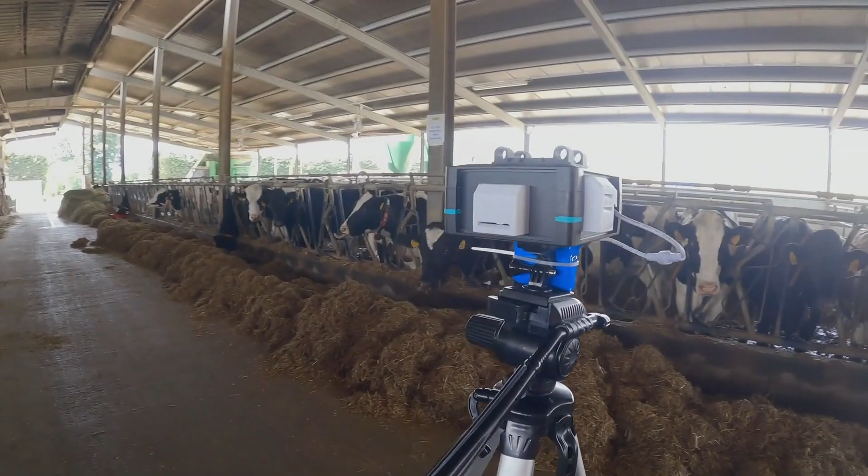Climate change is a growing problem, especially in food systems, which are considered one of the main sources of greenhouse gas emissions. Reducing emissions is one of the challenges to feed up to 10 billion people in 2050. To achieve these goals, it is necessary to develop efficient primary production systems with reduced impact on the environment, ensuring welfare and health of animals and operators. In addition, new systems for monitoring air pollutants are required to apply adaptive management strategies in farming systems.

In this context, the University of Florence, in cooperation with experts in the field of electronic and informatics engineering, in the frame of the CCC Farming Era Net project, developed a decision support system that can be applied at various levels, from farm management to research, control and certification bodies and public managers. The main objective is to create an off-grid measurement system of air pollutants and greenhouse gases, for real-time transmission to a server, its processing and subsequent consultation via web platform.

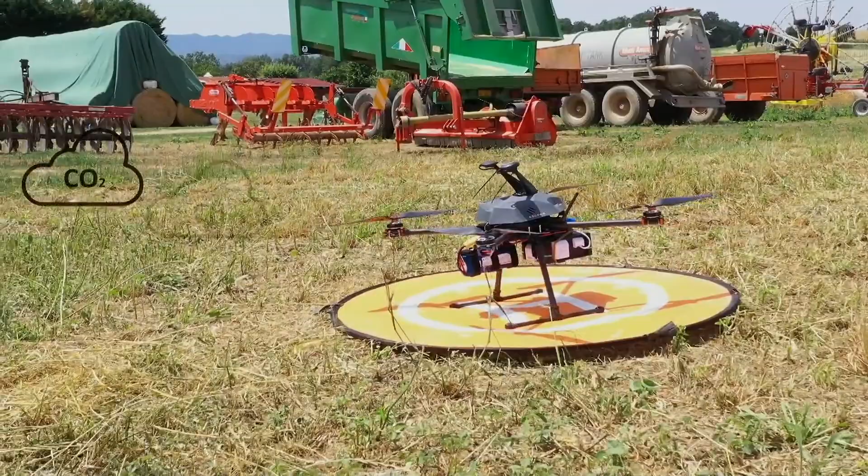The system is composed of a rotary wing drone equipped with a prototype control unit, specifically customized with suitable characteristics to host an optical and electrochemical sensor system. The sensors collect gas data in real time and provide georeferenced measurements that are transmitted to the cloud for further processing with proprietary algorithms and, finally, represented in a GIS environment for its correct visualization.

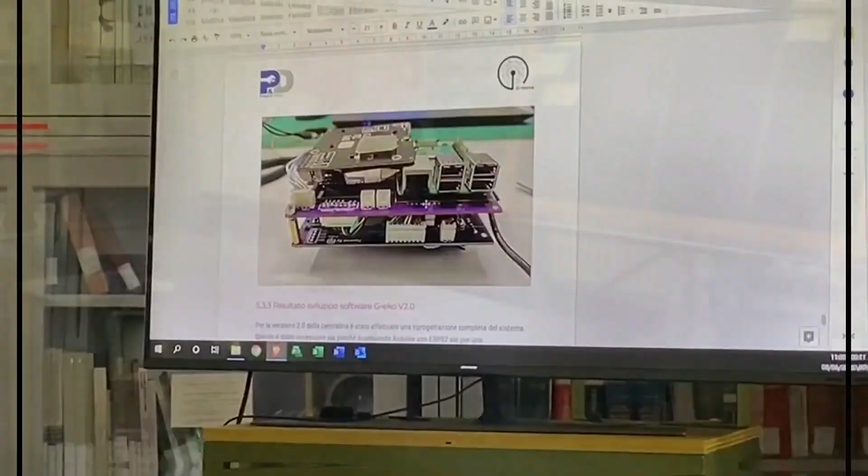During the meetings for the preparation and execution of the project, three major challenges emerged. The first was to develop a low-cost control unit equipped with high-accuracy sensors to collect and measure gases during flight. The second challenge was to create a small and lightweight control unit that could be used as payload on a drone and that would not considerably reduce the flight autonomy of the aircraft. And the third challenge, how to validate and test the developed system.

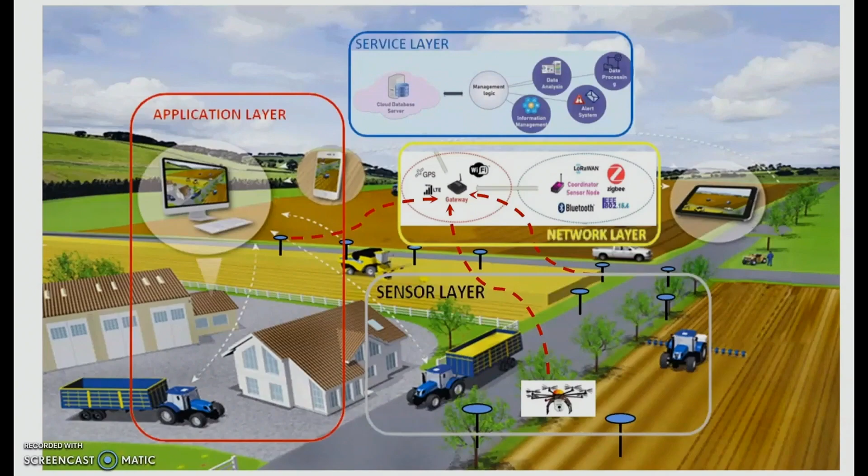For the realization of the first version of the control unit, the focus was on verifying the correct functioning of the entire system and, mainly, on the feasibility of the entire project. Basically, the system architecture is divided into 4 layers. Layer 1 is related to sensors for measuring gases. In Layer 2, the processing and transmission of the collected data towards the storage system is carried out. Layer 3 concerns data management and Layer 4 provides a tool for the correct presentation of the data. The functioning test and validation of the control unit and the sensors were carried out at the National Agency for New Technologies, Energy and Sustainable Economic Development, ENEA.

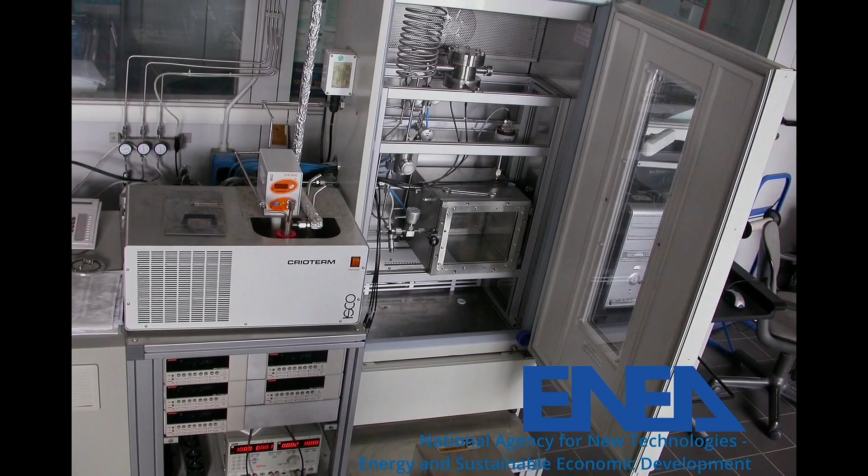ENEA is a public law body focused on research, technological innovation and the provision of advanced services to companies, public administration and citizens in the energy, environment and sustainable economy sectors.

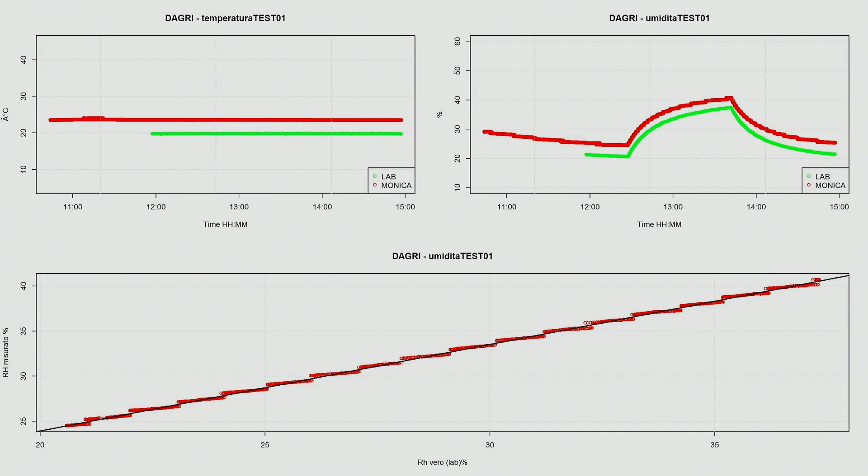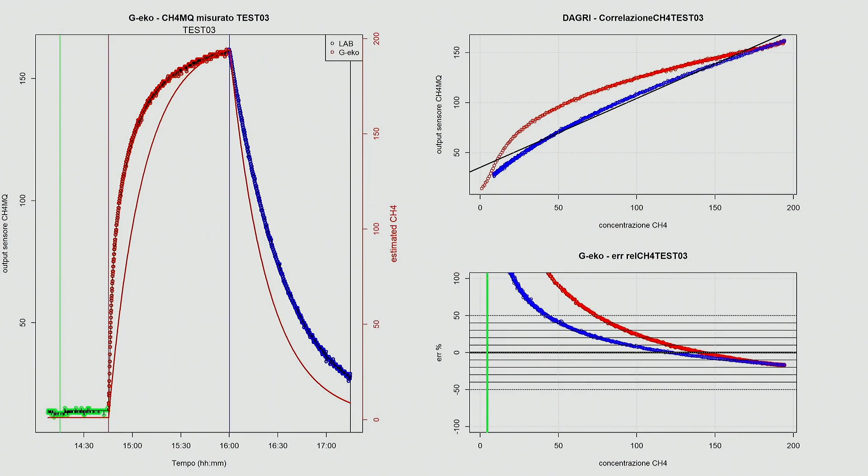For testing and validation, the compartment with the central unit and the sensors were placed in a 15L electropolished chamber equipped with industrial sensors, at a temperature of 20 degrees Celsius and 50% of relative humidity. Gases were injected into the testing chamber following a gradient of concentration, which was simultaneously measured by the control unit and the chamber sensors. After the tests, measures were analyzed by means of statistical regressions that demonstrated the high performance of the unit to measure gases and particulate. In addition, calibration equations were created to reduce the reading errors of the system.

Field tests were carried out on a livestock farm with approximately 450 dairy cows. 2 flights were performed on different days. The workflow included mission preparation, reconnaissance flight, mission planning and flight mission. The evaluated area encompassed all stages of production of the farm. Test results showed that the system clearly identifies the sources and levels of gas concentrations on the farm. It was possible to create maps of concentration and diffusion of gases in the total area of the farm.

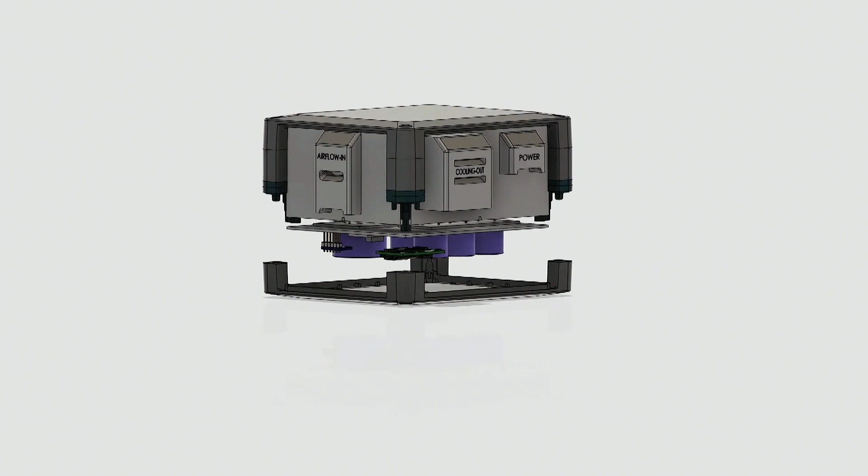After carrying out successfully the field tests, the necessity to develop a common version of the control unit for ground and in-flight measurements emerged. The weight and size of the ground control unit were not ideal for attaching to the drone. Therefore, for the second version, we focused on reducing the dimensions of the control unit. Also, we plan to include an application inside Raspberry to remotely view the measurements and be able to download data.

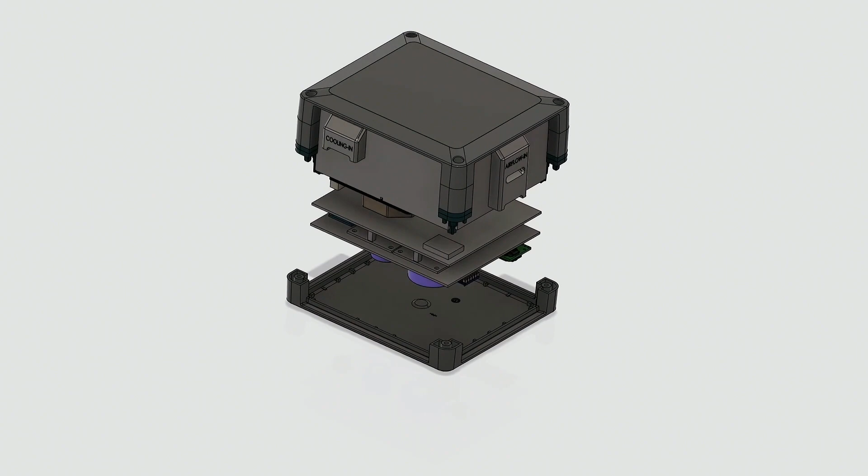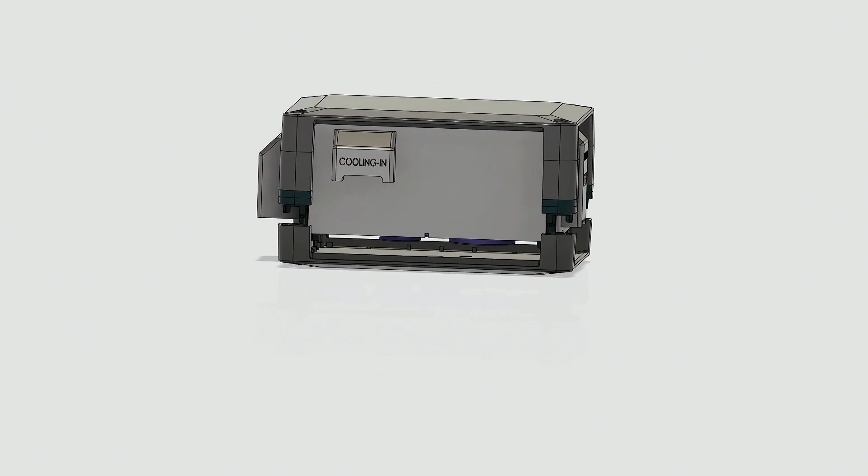In order to carry out a correct redesign of the control unit and to improve the problems highlighted in the first version, a 3D modeling program was used to simulate the volumetric occupation of each component of the control unit. The new version of the control unit carries 9 sensors and a Raspberry board in a volume of 804 cc, with a total weight of 750 grams.

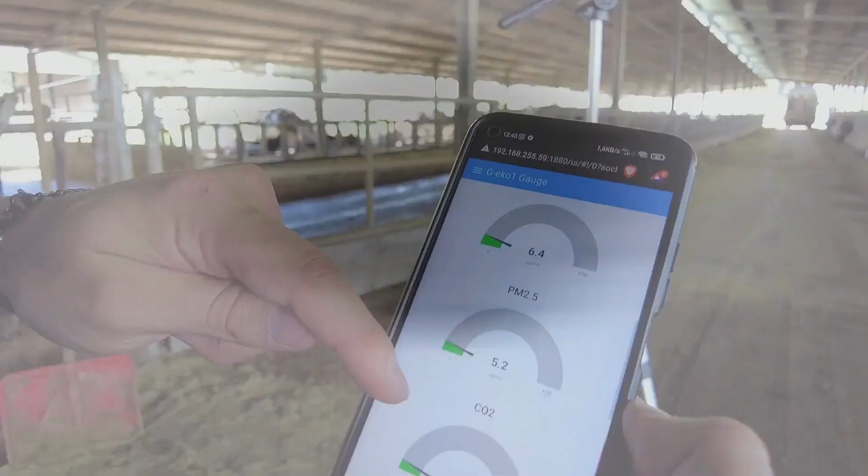A dashboard was implemented to remotely view the data. The dashboard can display information from several units at the same time. It is possible to observe real-time measurements from all sensors in the system in the same view, allowing a more dynamic analysis.

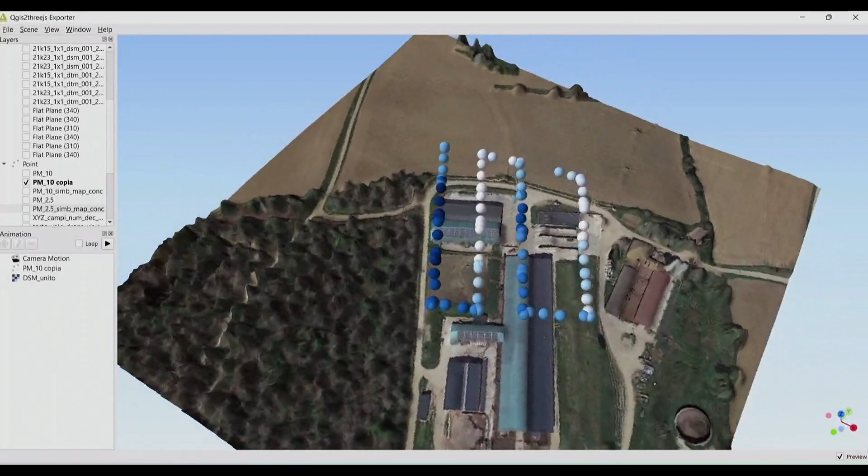In-flight measurements collected in the field need to be represented spatially. For this, the QGIS software was used to create a 3D map of the studied area and to perform an interpolation of the data, so that the spatial variability of the results can be investigated. In the tests carried out, the spatial distribution of particulate matter escape in a cattle farm was visually represented.

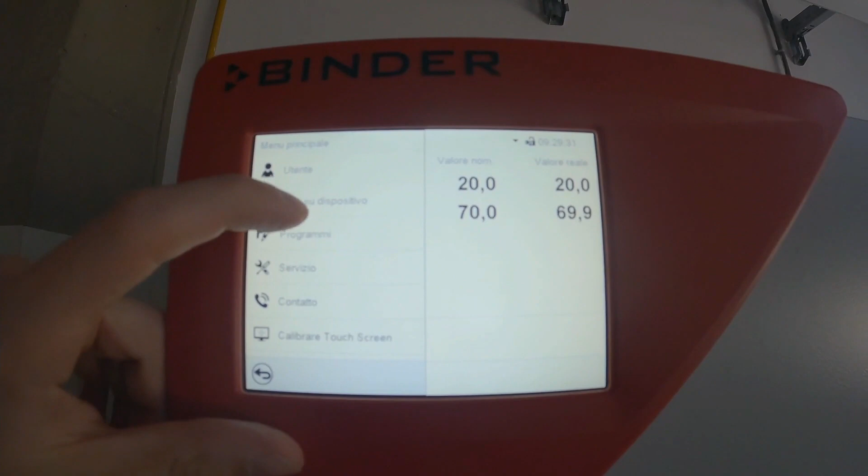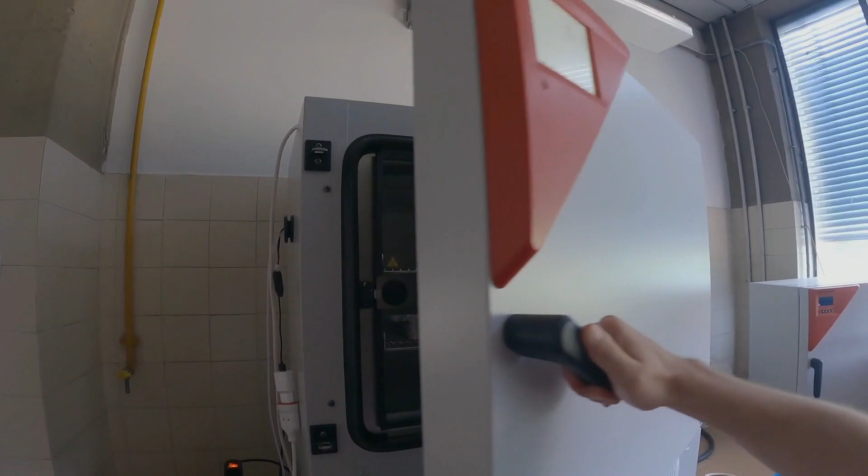Although the system has been calibrated in a specialized facility, a second laboratory test was planned under different environmental conditions. The second version of the unit will be placed into a climatic chamber where field conditions will be simulated in a controlled environment, in order to evaluate the accuracy of the unit measurements compared to those from a commercial photoacoustic gas analyzer, in constant ventilation, but under different temperature and relative humidity regimes.

Further improvements of the control unit will be implemented, to reduce its weight and improve its functionality. Field tests in livestock farms will be carried out, in order to optimize a measurement protocol for emissions assessment.